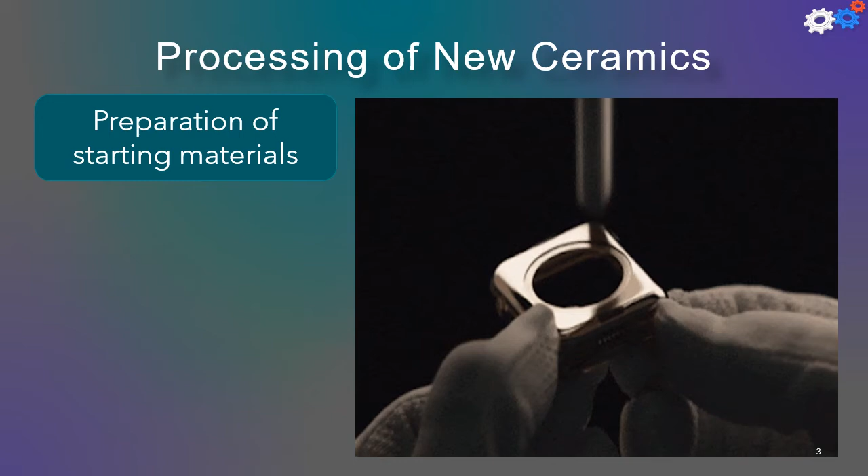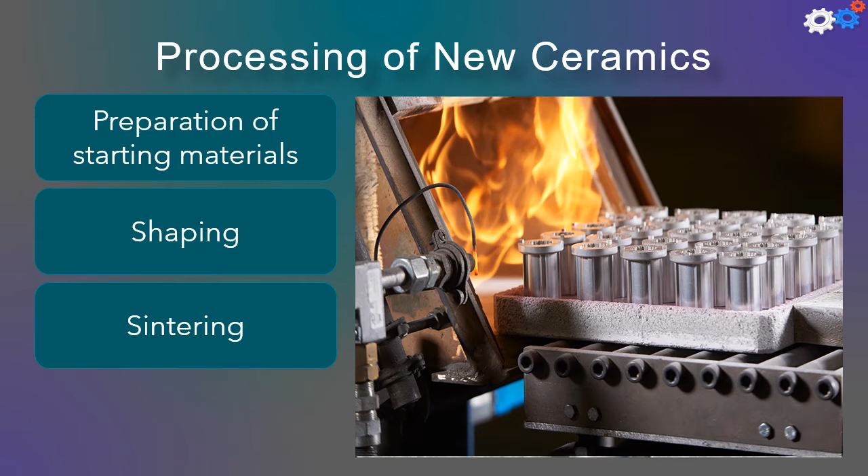The manufacturing sequence for the new ceramics can be summarized in the following steps. First, the preparation of the starting material. Second, the shaping. Third, the sintering. And finally, the finishing. While the sequence is nearly the same as for the traditional ceramics, the details are often quite different.

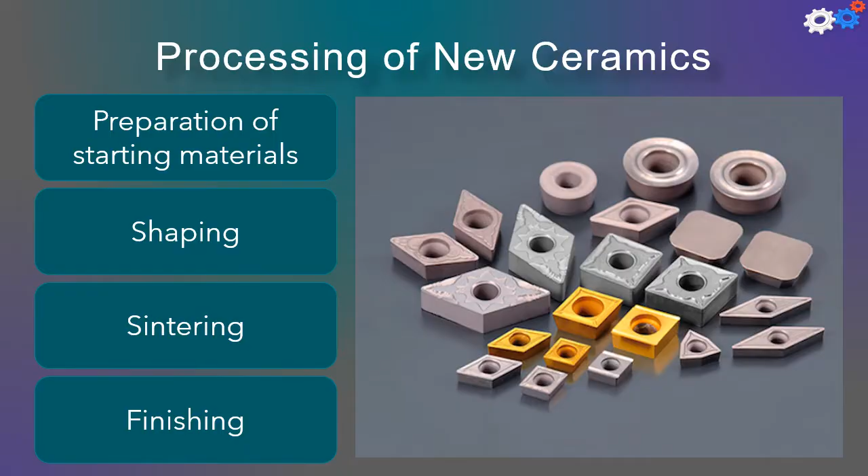The strength requirements are usually much greater for the new ceramics than for the traditional ceramics. The starting powder must be smaller and more uniform in size and composition, since the strength of the resulting ceramic products is inversely related to the grain size. A greater control over the starting powder is required. Thus, the powder preparation includes mechanical and chemical methods.

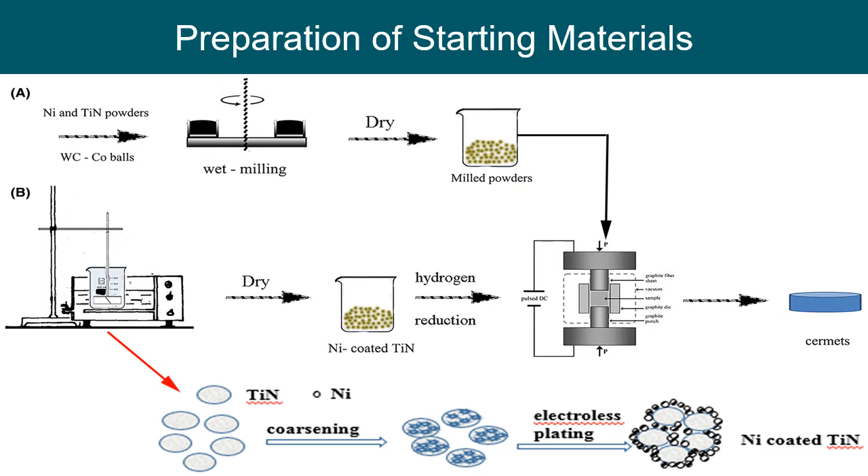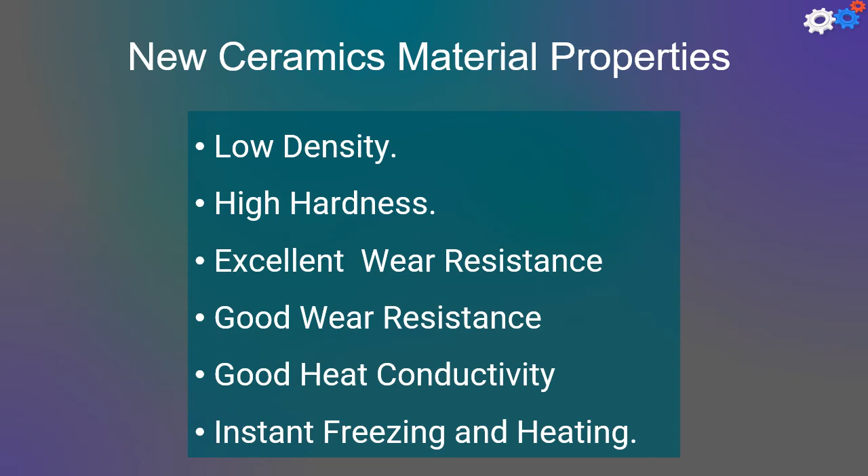The material properties for the new ceramics include the low density, the high hardness, the excellent wear resistance, the good heat conductivity, and the instant freezing and heating.

Many of the shaping processes are borrowed from powder metallurgy and traditional ceramics. The powder metallurgy press and sinter methods have been adapted to the new ceramic materials, and some of the traditional ceramic forming techniques are also used to shape the new ceramics, like slip casting, extrusion, and dry pressing.

Hot pressing is similar to dry pressing, except it is carried out at elevated temperatures, so the sintering of the products is accomplished at the same time as the pressing, and this eliminates the need for a separate firing step. Higher densities and finer grain sizes are obtained, but the die life is reduced by the hot abrasive particles against the die surfaces.

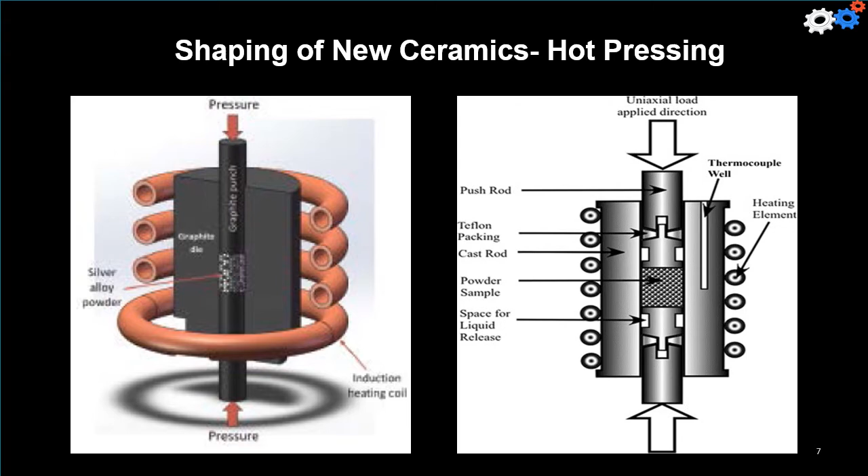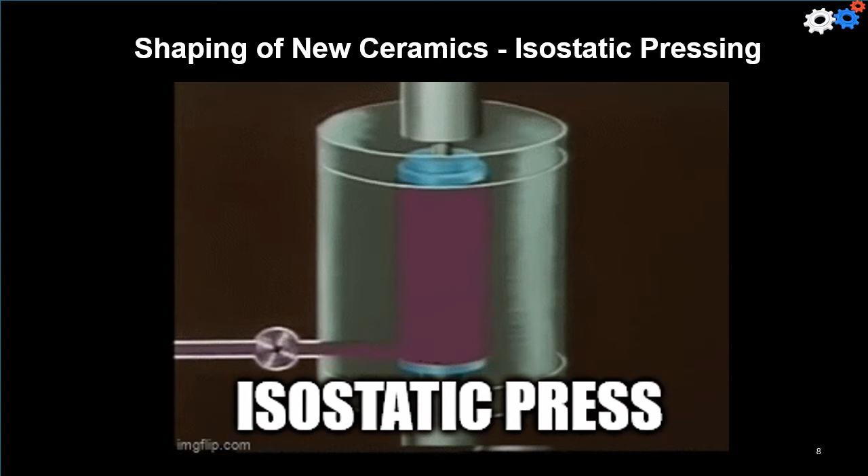Isostatic pressing uses hydrostatic pressure to compact the ceramic powders from all directions, and this avoids the problem of non-uniform densities in the final products that's often observed in conventional uniaxial pressing. The same process is used in powder metallurgy.

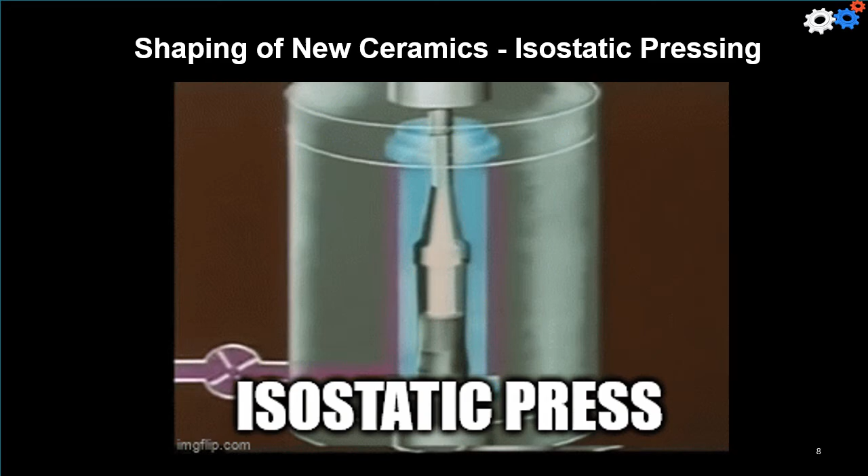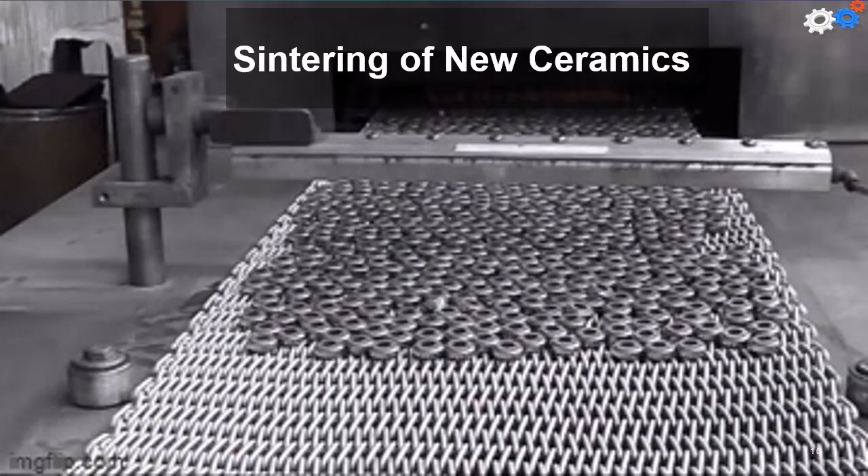Because the plasticity needed to shape the new ceramics is not normally based on water, the drying step required for traditional green ceramics is omitted for most of the new ceramic products. The sintering step is still very much required. The functions of sintering are the same as before. First, it bonds the individual grains into a solid mass. Second, it increases the density. And third, it reduces or eliminates the porosity.

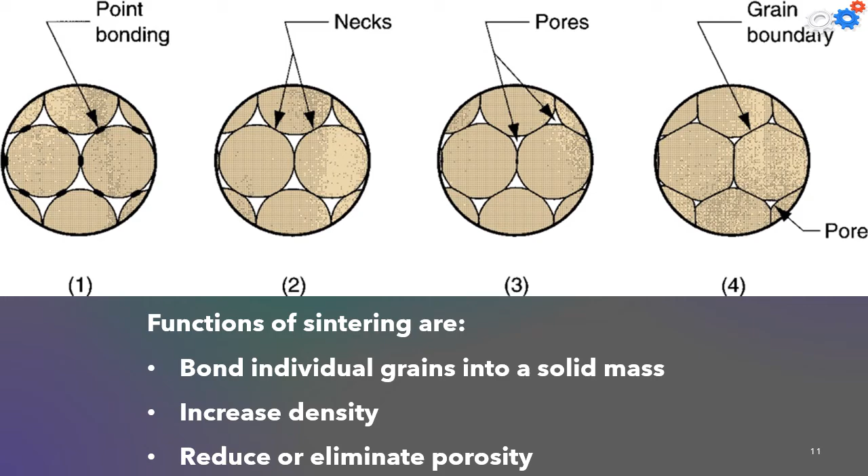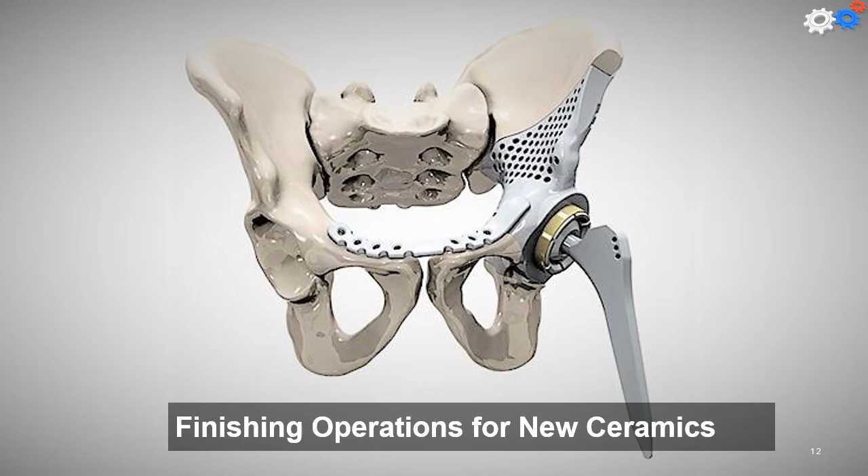Parts made of new ceramics sometimes require finishing for one or more of the following purposes. First, to increase the dimensional accuracy. Second, to improve the surface finish. And third, to make minor changes in the part geometry. The finishing usually involves an abrasive process. Diamond abrasives must be used to cut the hardened ceramic materials.